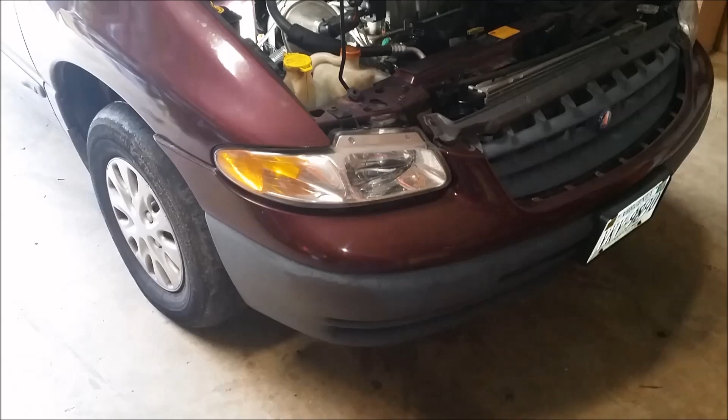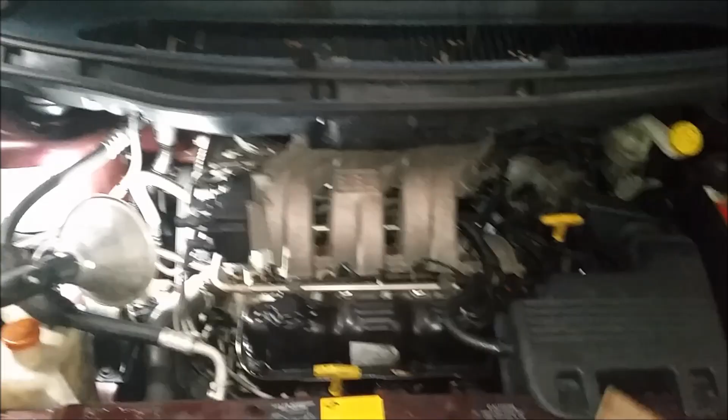This repair is for replacing a power steering pump on a 1996 through 2000 year model Dodge Caravan or Plymouth Voyager that has the V6 engine. If your fluid reservoir is not on the left side, this repair is not for you.

So this is the power steering pump, and the whole problem is getting to the bolts. There's 3 bolts, 1, 2, and 3 on the front side of this pump that you have to remove. Of course, in front of these 3 bolts there's a bracket that wraps around and bolts up to the engine block, both here and there.

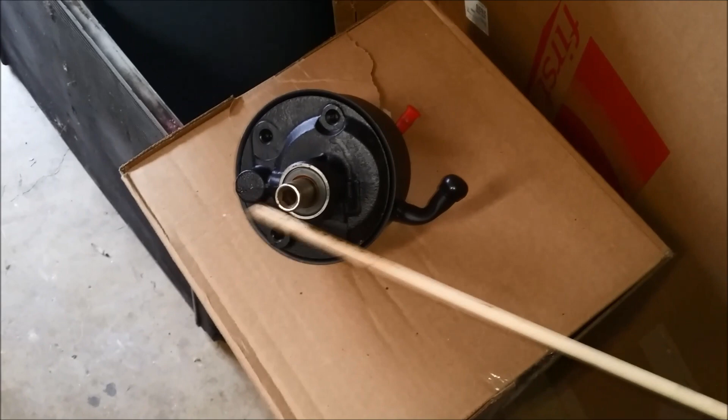So first you have to remove these 3 bolts, then you have to remove 2 bolts on the rear of the pump, and then you have to remove all the bolts on the bracket that sits behind here. One very difficult part to remove is that bolt right there.

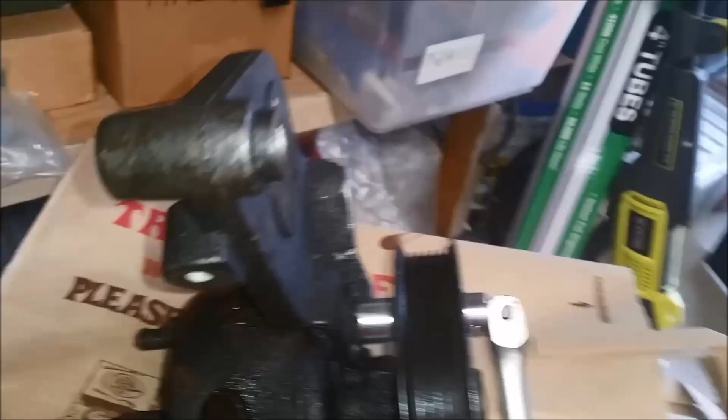Here's the pump removed from the car. There's 2 more things you have to do before you're done with this pump. One thing is to remove the bolts that hold the pump to the pump bracket, and the last thing you have to do is to remove this pulley

from the pump, and you've got to press it off. You can't unbolt it, you got to press it off. There's all kinds of instructions on how to do that on other clips.

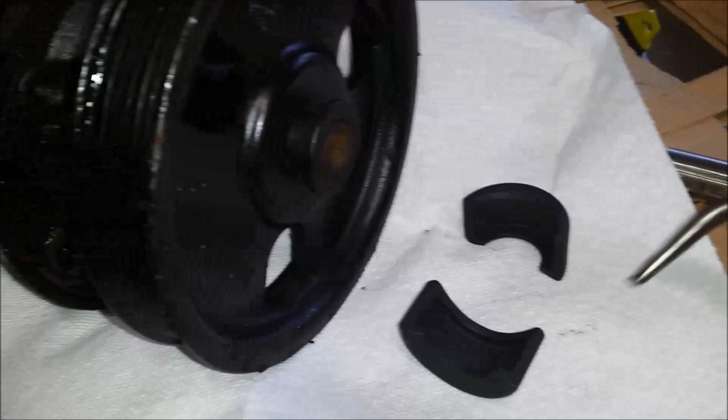Now the disassembly is not over until you get a special puller kit like this that has a split collar which goes on here, and you pull it. You cannot use a traditional hub puller on this pulley, otherwise it'll break because the material's way too thin. So this is what the hub puller looks like assembled on the hub, and we're going to apply some torque and pop off that hub.

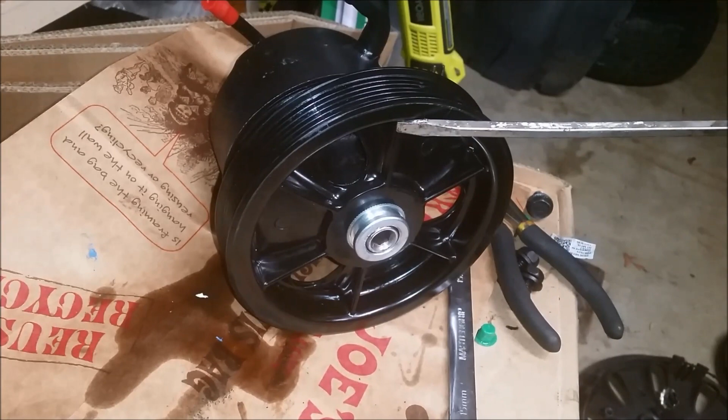One last very important detail. That's the new power steering pump. You've got to put the pulley onto it from the old pump, and the only way to get this pulley off is to pull it off with a special puller.

There's a problem. This pulley is made out of plastic. Even though that's aluminum, there's an aluminum hub that's cast into the plastic. You got to be very careful. You cannot put this pulley into a bench vise to turn the hub puller. You got to be very careful with it.

And the last very important thing that's not obvious is that the outside of this shaft has to be polished and cleaned up thoroughly. Plus the inside of this hub, which is made out of aluminum, also has to be polished. If you don't polish both of these with wet or dry sandpaper or emery cloth, you won't be able to push this onto the shaft.

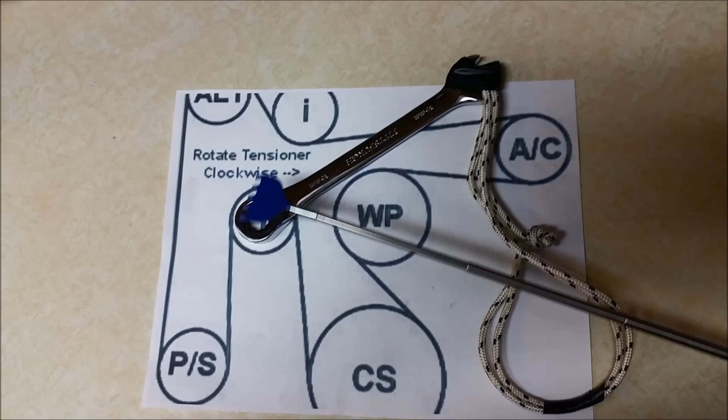Last but not least is the question of getting the belt on. The Serpentine belt is very difficult to install on this car. The reason is that the tensioner pulley here is in a really bad position. Not only that, the distance between the bolt on the tensioner pulley and the fender well is very, very tight. So it's very difficult to get a ratchet in there or anything else.

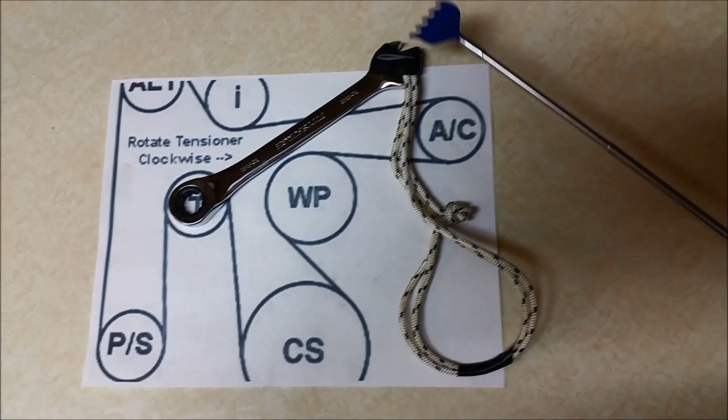So I found the only tool I could use to get the job done easily is to make up my own tool. This is a 15mm ratcheting box end wrench with about 1 foot of nylon cord taped onto the open end. What you do is you place this on the bolt, the 15mm bolt, so on the end of

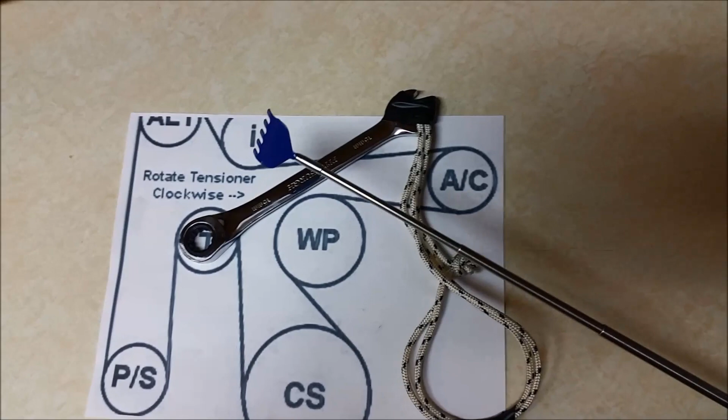the tensioner pulley. Run your belt over all of the rest of the pulleys, even the idler here. Put it all around except leave it loose on the bottom. This is the crankshaft pulley.

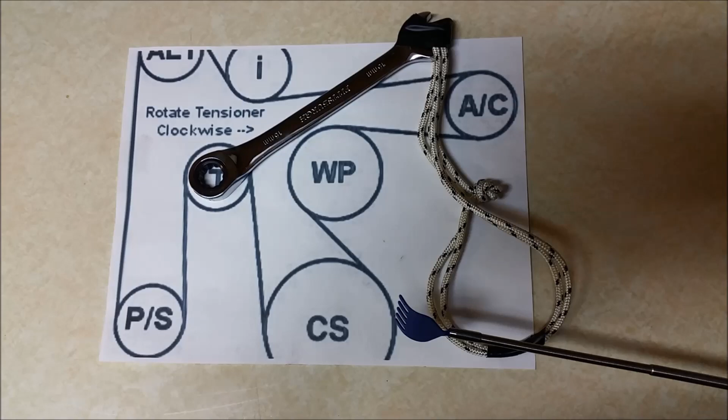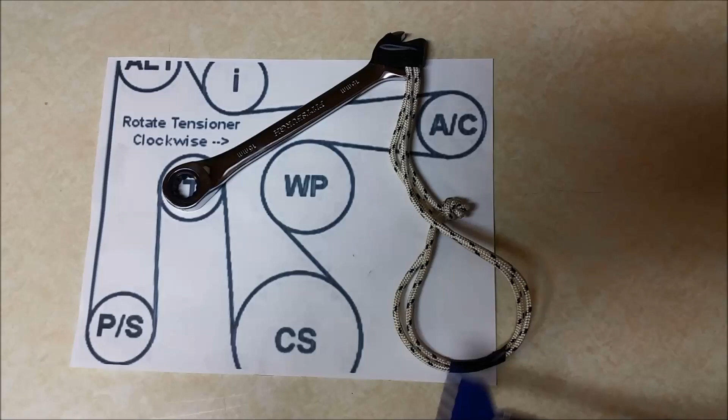The reason is, while you're pulling on this, you're underneath of the vehicle, you can get your hands on this pulley very easily, and this pulley also has a very shallow ridge on the end, which means you can fit the belt over. So you pull down on this, it gives you a very long stroke compared to other tool arrangements. And while you're pulling down on this, all you need to do is work that belt. Even a tight fitting belt will go over the bottom of that pulley, which you're looking right at.

So for me, that's the only way I could finish this job. Good luck. If you do this job yourself, you'll save yourself about $500.